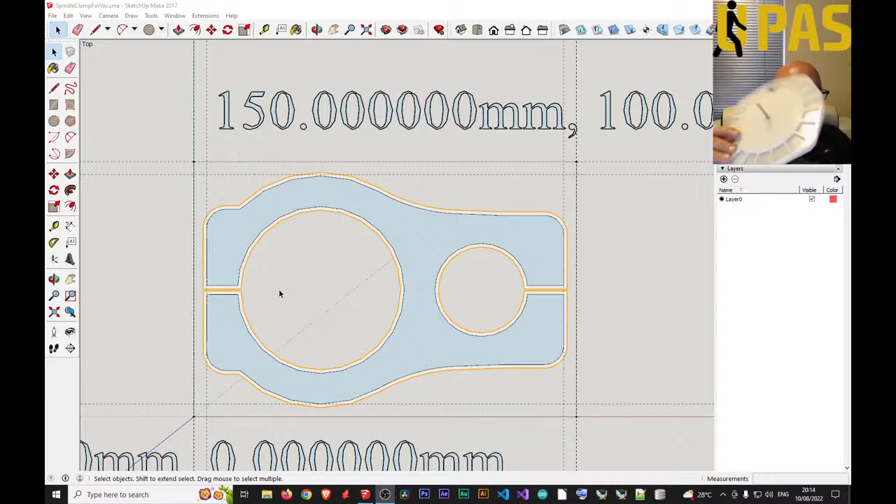Right, so I wanted to laser cut a carousel in layers, so I didn't have to mill too much waste, so just cutting out. Anyway, I ended up with some of this white opaque plastic sheet. So I designed it around the size I'd got. But it turns out it's far too, what shall I say? It's the kind of stuff that you'd probably injection mold or heat press to shape. It's too soft to mill, if you know what I mean.

This is what I managed to sort out. I put a temporary fix in it. You can't see it, but it's too frayed. There's bits sticking off it, and there's a lot of work to do to tidy it up. And it melts basically. It just melts. So this was a fail. So whenever you mill anything out, don't try to make it out of this soft stuff. It's not good. You want polycarbonate, really.

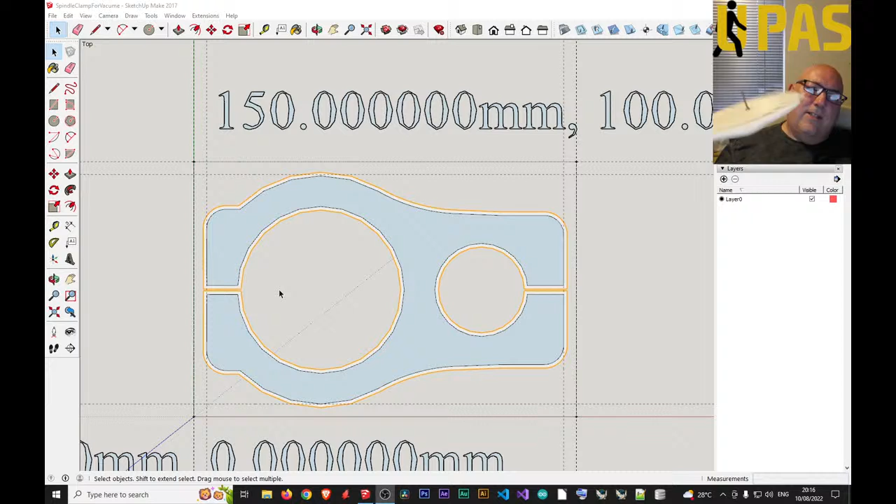This stuff, I don't know what it is. I bought it as a lot. Didn't know what it was. It's not really of any use. I suppose it might be alright if it was laser cut. So I did it on the CNC. Now this stuff, I definitely wouldn't. You probably need to laser cut it. I don't know if it would set on fire or not. Anyway, that was a fail. So a waste of material there.

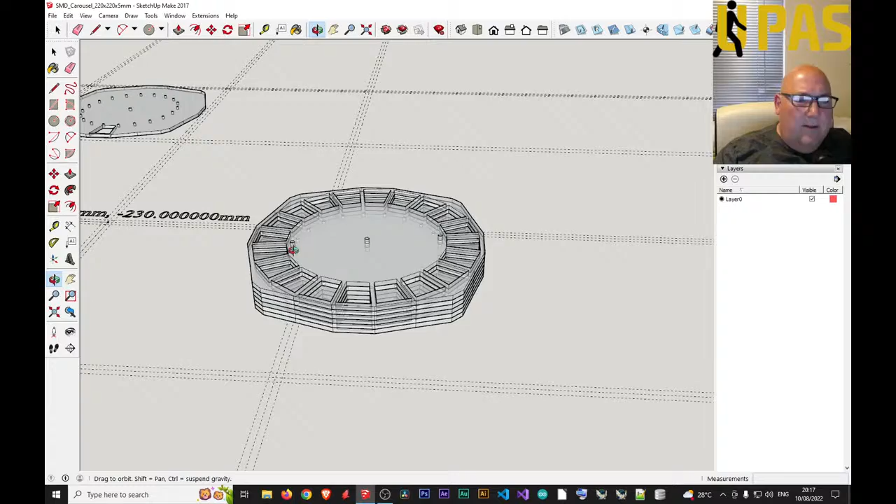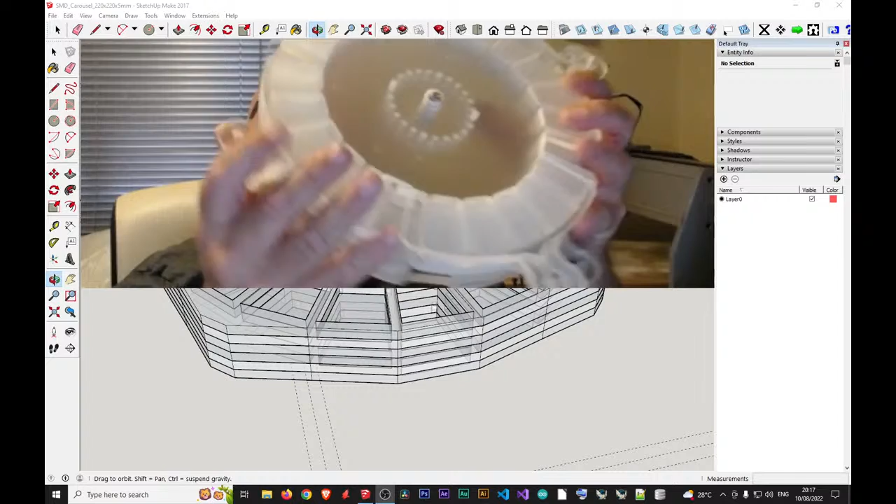If you saw my last live stream, let me just quickly load it up, and you can see. Yeah, this is the design. Let me just make sure. Right. So this is the design. I changed it. It wasn't to replace the one I did earlier, which was this one. Let's just quickly go over to a different view. So it wasn't to replace this one. This is the one I've been working on for weeks. I still like this one.

It's a heavy thing, and a lot of money's worth of material if you had to buy it new. It's about 12 mil polycarbonate, about 250 by 250, 12 mil thick. You're probably looking at about £7 to £12 just for a sheet. So there's a bit of money's worth there, but I didn't pay that because I bought the sheets as scrap.

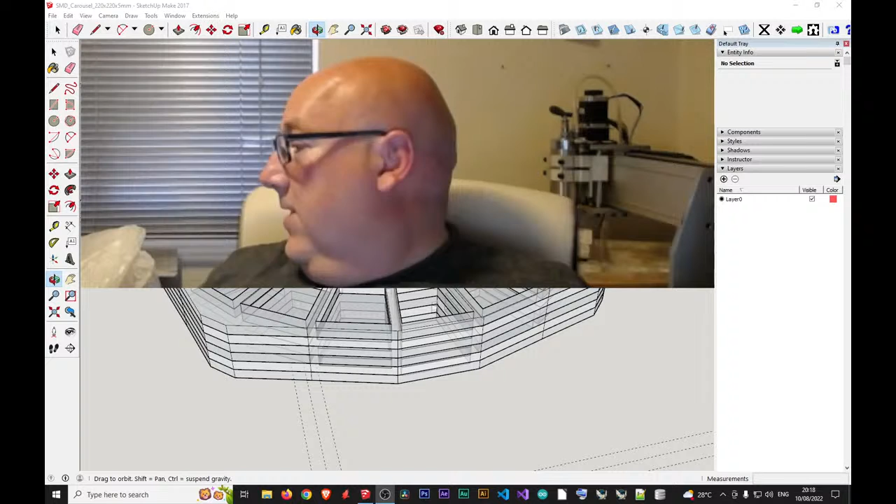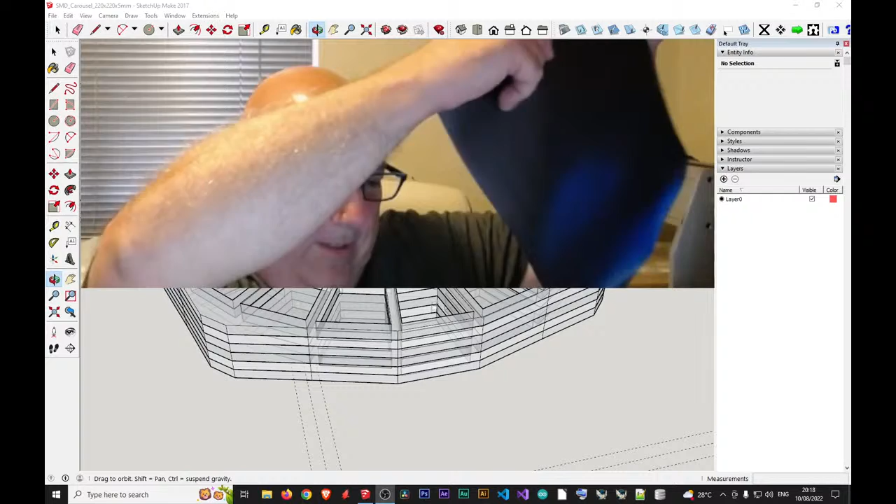Okay, so anyway, on a tangent, I have actually got hold of the piece of rubber I told you about last time. Right, so there's a bit of rubber here. It's a bit of magnetic rubber, like signage. It's magnetic one side, they told me. It's quite good actually. See there? There's a washer. You can put the washer and it just sticks to it. Apparently, it only sticks one side. Let me just try this side. Yeah, it doesn't actually stick that side, so that's good.

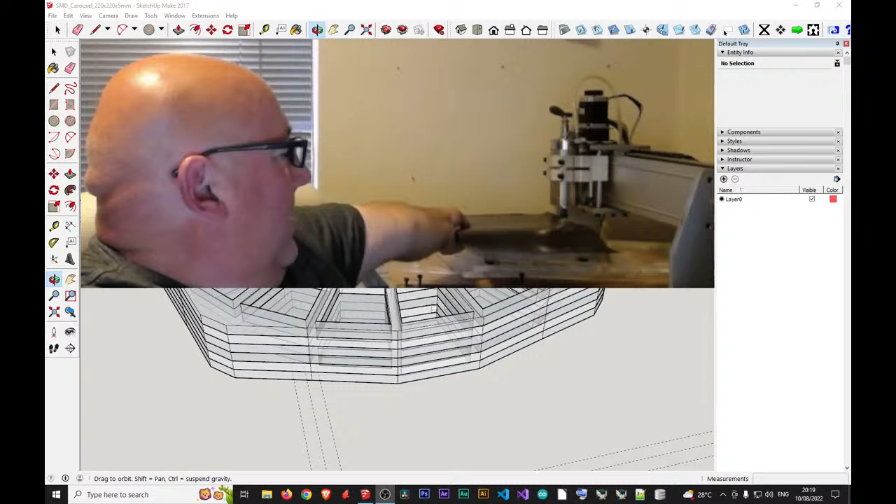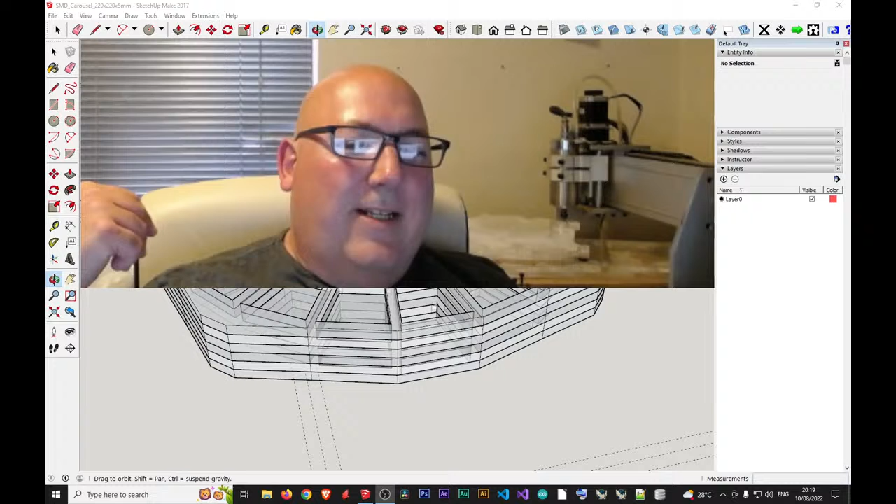So I can lie this on top of there. So what I've got to do is laser cut this out into a circle, or the shape of the carousel. I don't know yet. And either spray adhesive, or just rest it on top. I don't know whether surface mount bits will stick to it. I'd have to try some, but anyway, I just needed a rubber mat. So rather than just a rubber mat, it's magnetic as well, so if things are metal, they will stick to it. Okay, so there's that.

So going back to this design, this one was designed to be laser cut, and no milling apart from milling straight through. And they're 5mm sheets. And I changed the design of the handle slightly, and I made the access so you just go through it and down in. This was a slightly smaller thing.

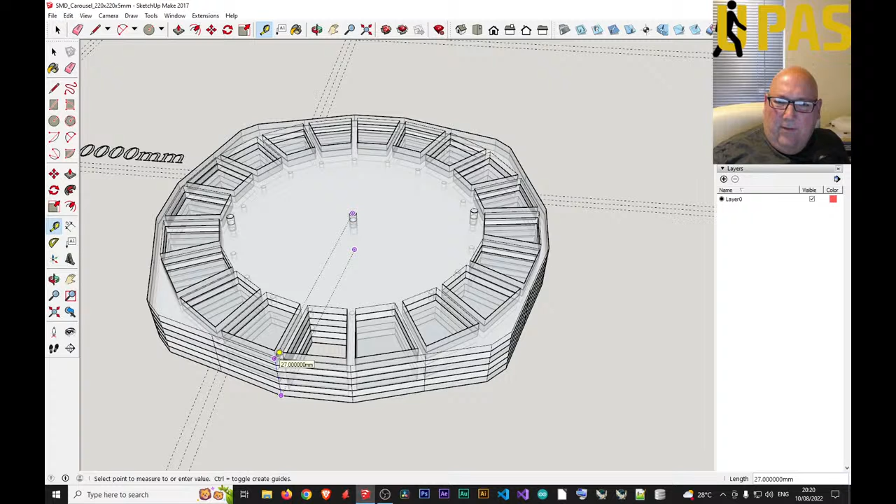What have we got? Let's have a look here. 220 instead of being 240, it's 220, and the height is 27. But I haven't actually. Oh yeah. This was designed to be as minimalistic as possible. So you've just got a base layer, which just happens to be the top layer as well. Okay. And you can see it spread out the ball bearing indents as well.

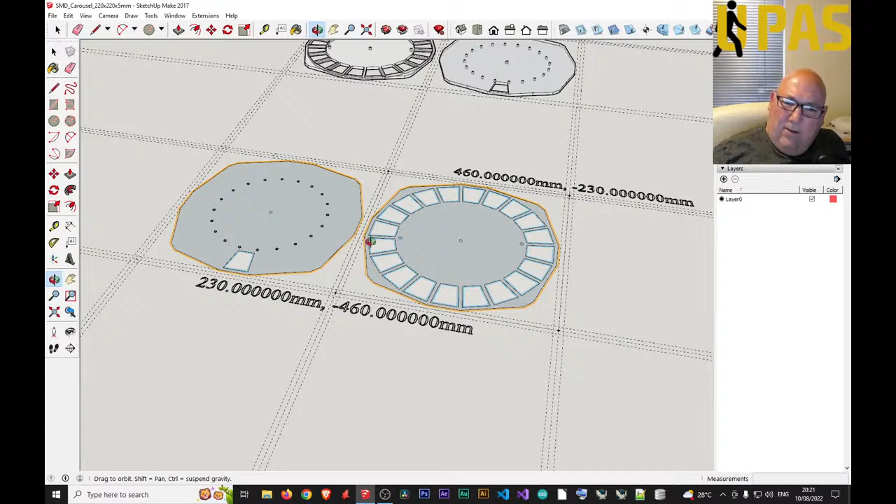And you just got two different layers basically, and this is designed to be laser cut. So you don't mill out the pockets or anything. You cut them straight out, and you just place that on top of there. So let's have a look over here. Yeah, so these are in two lots actually. This one, they come as a group. So if I go into that one, you'll see it's got a base layer and two upper layers. So the cutouts here are the pockets.

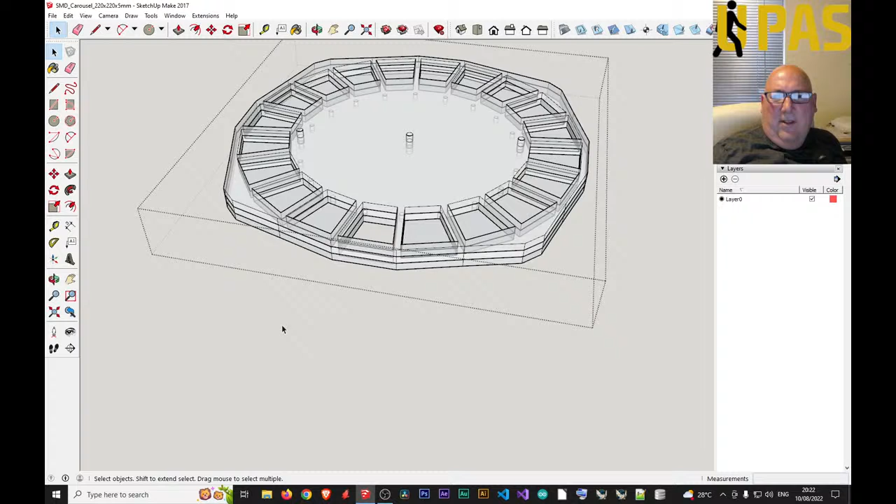But like I said, I tried to make it out of this. I don't even know what I've done with it now. Yeah, there it is. Tried to make it out of this soft stuff. No good at all. Gotta be careful with that. Anyway, so I will make another one of those out of some clear polycarbonate. But it's not to replace the other one. It's just an alternative way of making one. Without bearings, without anything. Anyway, I told you about that last time. So let's get back to today.

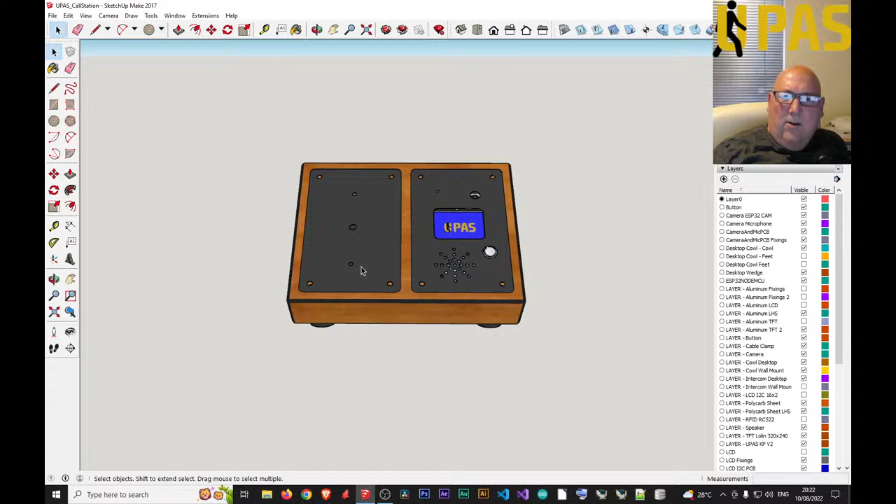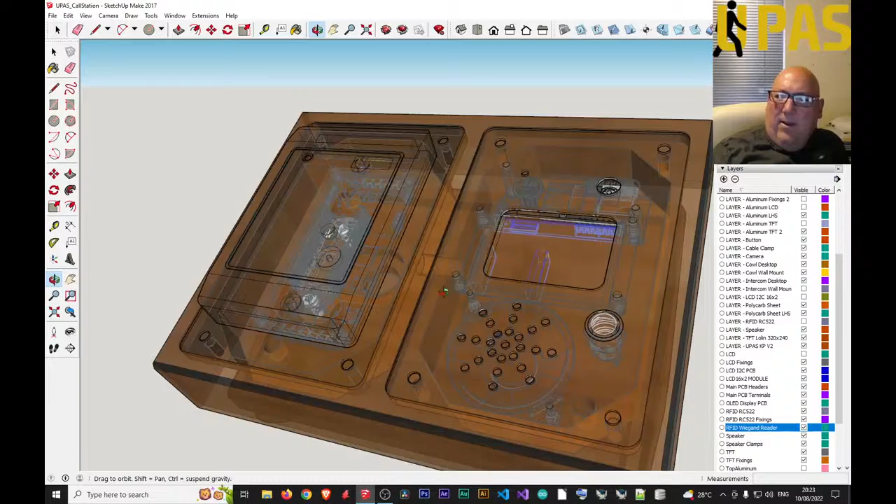Other project, the call station. Don't forget, we haven't forgot the call station yet. The UPAS ESP32 intercom call station. So I've got some extra wood for that now, and I've got a guy going to get me an offcut of mahogany next Sunday, if he can, to build this one. So if you haven't seen that one, let's go 3D X-ray. Yeah. So this is the one that I'm going to be building very soon. I just had a bit of a break while I've been working on the carousel, giving my mind a rest. So as soon as I finish my carousel and my clamp, we'll get back onto that.

So today, what I'm going to make is this. I designed this this morning. This is a spindle clamp. It's going to be made out of clear polycarbonate, 12mm. I've got a piece left over from making the carousel. Hopefully it's enough. Let me just measure that between there and there. What have we got? 89.5 mil. Okay, and we need a piece 140 mil. So 90 by 140 mil. Let's just get rid of this. I hope the piece I made the carousel out of is still gonna fit.

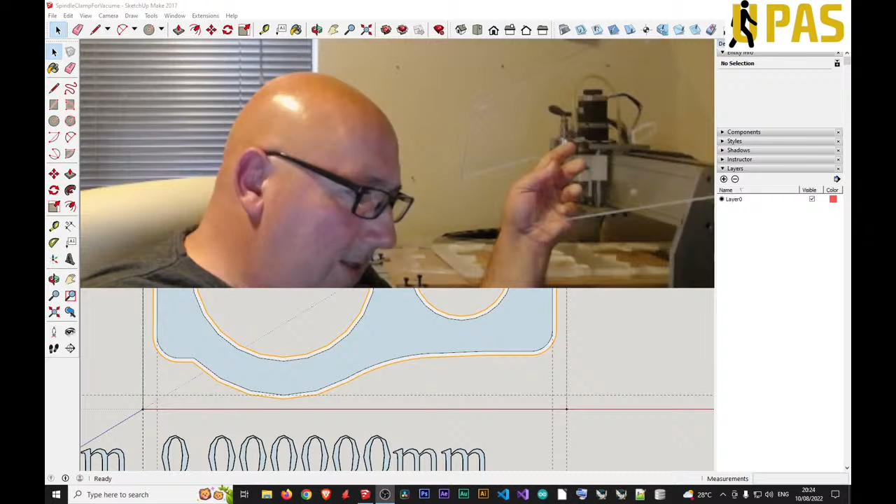By the way, that magnetic rubber sheet, it comes rolled up, and you have to leave it for a few hours or half a day to uncurl itself. Right, so let's just move a bit of that. Hang on, let's get you on to another view a minute. Yeah, this piece went a bit wrong, as you can see. So that's gonna have to just be for scrap, all testing stuff.

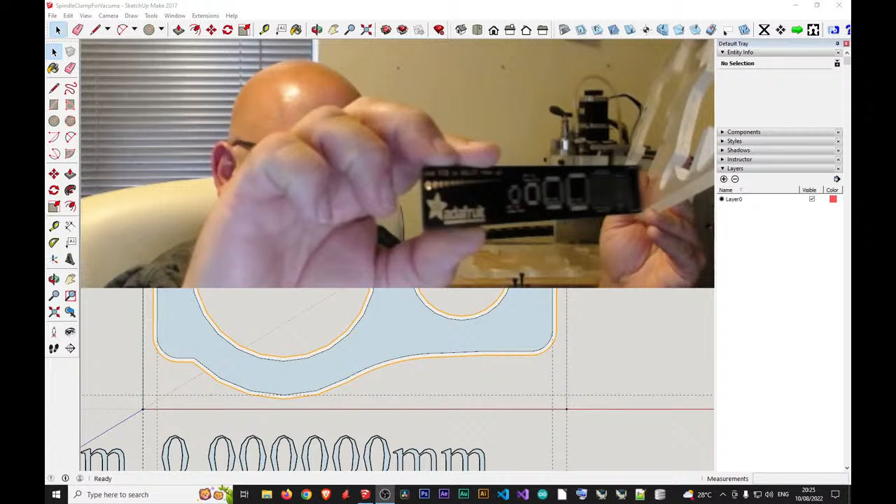That piece there, let's just show you a minute. Right. Okay, now this piece here, this is what's left out of the carousel. 2 layers of the carousel. I was hoping this middle bit would be wide enough, actually, to do that last bit. What have I got here? Oh, it's an Adafruit ruler. Yeah.

Right, anyway, so let's have a look. So I need, we said it was 90 mil across. Hang on, you can't see it. Let's get back to the other one. Right. Yes, 90. I'm pointing to it. We need the mouse. From there to there, it's about 90 mil. 140 mil from there to there. Now, on this piece here, what have I got? Let's have a quick measure.

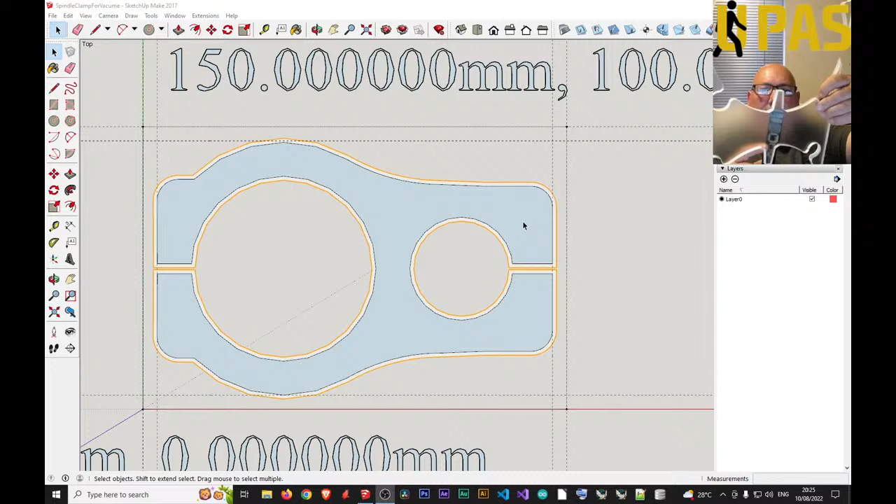Have I got 90 mil? Well, just about got 90 mil there. The smallest bit is 75 at the one end, and this end is 65. So let's just have a quick look at that. So 90 mil the one end, 65. Right, and then this bit here is 60. So I'm just trying to see if I can get it out of this bit. So I've got 60 there.

Yeah, I might be able to make it out of that bit. Yeah, I think I'll give that a go. Alright, it's going to be that way up, so I'm going to have to clamp that in the thing. I've got another piece as well. If it goes wrong, I'd rather do it out that bit. I've got another bit here. 2 bits. Both from the cutout.

That's different material, isn't it? I never noticed they are two different materials. Or is it? No, maybe wrong. No, they're both the same, apart from the thickness. Anyway, let's get rid of that one out of the way a minute.

Now today I just want to mill that out. I just want to make myself a piece. Oh, I've got another bit of this. I've got lots of bits of plastic here. That was the top layer I milled out for the carousel. The scrap bit that's left over. Alright, I'm gonna have to find some more plastic pretty soon. Right, so I'll put that down there.

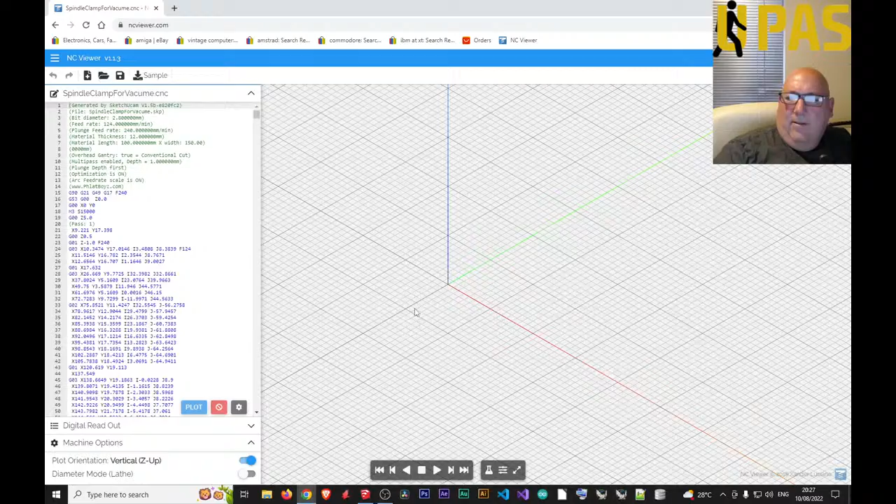So there's the G code. Well, representation of the tool path, really, rather than the G code. But yeah, there is the G code there. This is a representation of the tool path. So, see how many passes it is. 1, 2, 3... 15 passes. That's quite a lot. 15 passes. Why is it 15 passes?

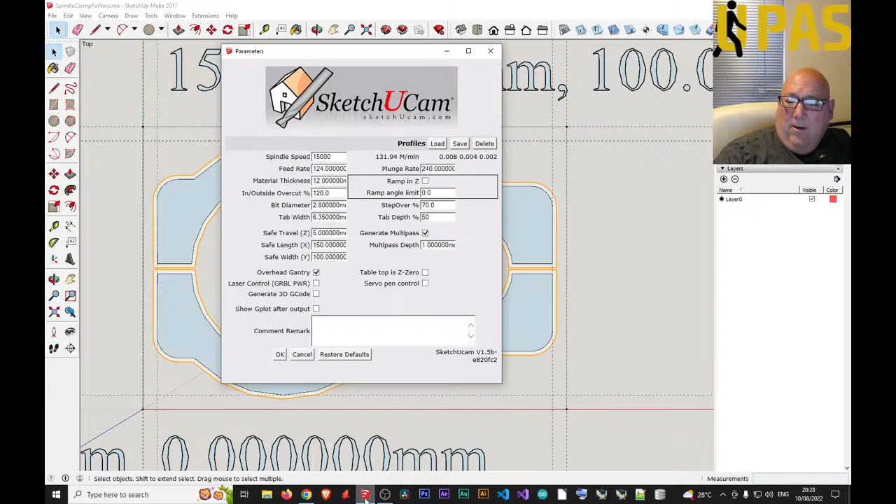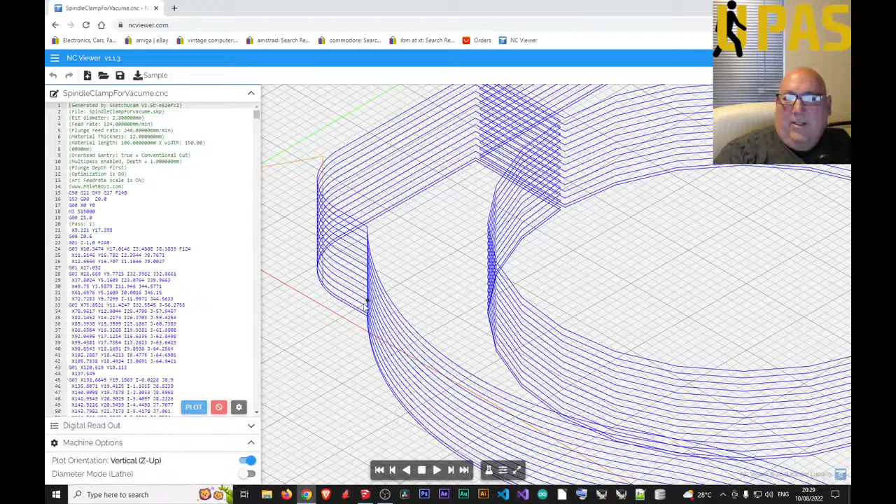Probably I told it to do 120%. I told it to go 120% inside outside overcut, so past the point of the thickness of the material. It's 12mm and we got 2.8 bit diameter, and we're doing multi-pass depth 1mm at a time. Okay, 1mm at a time. It is polycarbonate after all. Okay. How many did you say it was? 15. Yeah, so that makes sense. 120%. So it's doing an extra few.

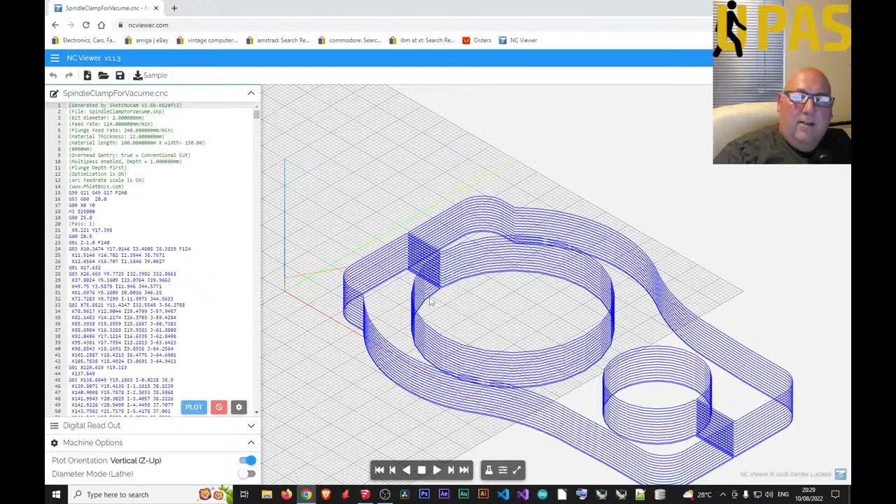So I don't want to deal with the bottom edge not milling enough. Sometimes if you make it exact size, it'll mill it, and if your tabletop or your spoil board is slightly uneven, you'll get a bit that hasn't cut out. I don't really want to do that. I'd rather it cut slightly into the spoil board, but I will have to hold on to this. That's the only problem. I'll have to slow down the last couple of cuts physically on the CNC, the milling software, Mach 3.

Okay, so back to this one. Yeah, so I made this, I just did it with two circles, and I've gone oversized, so the spindle size is 65 mil. I'll give it 1/2 mil of clearance. Okay, and my Henry Hoover vacuum cleaner is 36 mil. I've got an extra 1/2 mil on that.

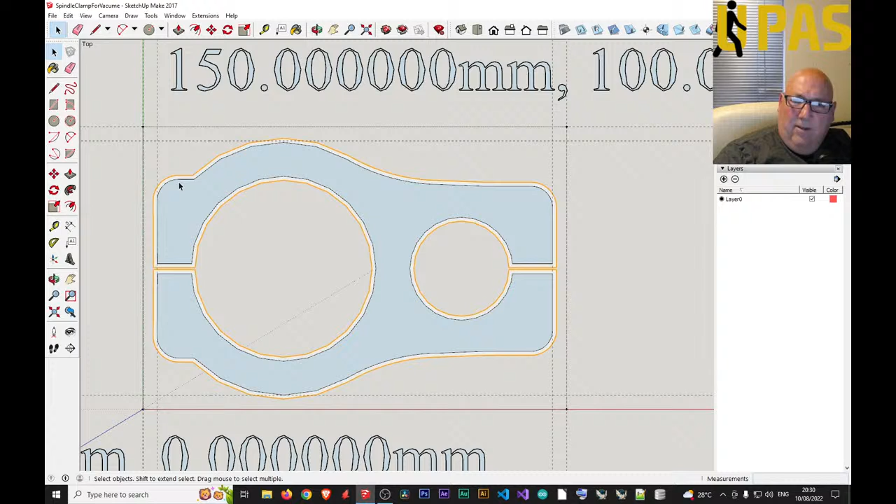So the idea, what I'm going to do, mill out this, and I'll have to manually get a drill and drill bit and drill through there, sideways on, and there. What I'll do is I'll drill it with one side so far and so far, so I can get a nut and hide the head and nut in there. Same with here. Then I'll drill a small hole to go all the way through, and you won't have to tighten it too tight. So just a little bit gives me a bit of clearance.

The 2.8 mil bit will mill around there. So let's have a look. 3.52. Yeah, so it's going to be a 3.5 mil gap either side, which gives me a little bit of leeway to clamp it up. Hopefully it won't snap. It's got to be quite a close tolerance to the size, because you don't want to be bending this too much. So wish me luck. Anyway, right.

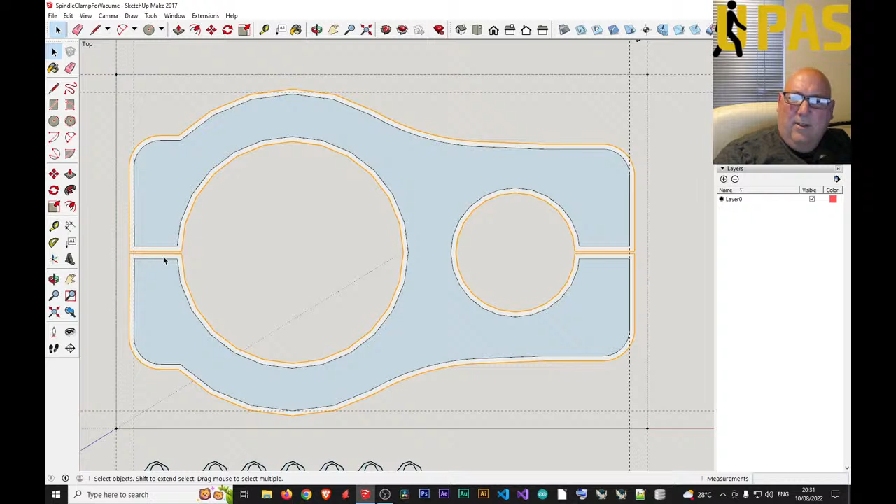So we've already got the G code for it. So all I need to do now is go over to the CNC, which is behind me. I haven't got the camera set up, so it's just that camera. Gonna have to look over it. Right, so I'm gonna have to swap over positions. The mic's gonna have to spin round. You're gonna have to see me sideways on for a bit.

Right, let's switch on some stuff. Switch on the CNC. Okay, and run the Mach 3 software. You can't see the software yet.

Okay. When you first switch on your CNC, your stepper motors start to spin a bit. They start to hiss, so you have to just go through all the motions just to stop them hissing. Still got the 2.8 mil bit on from the other day.

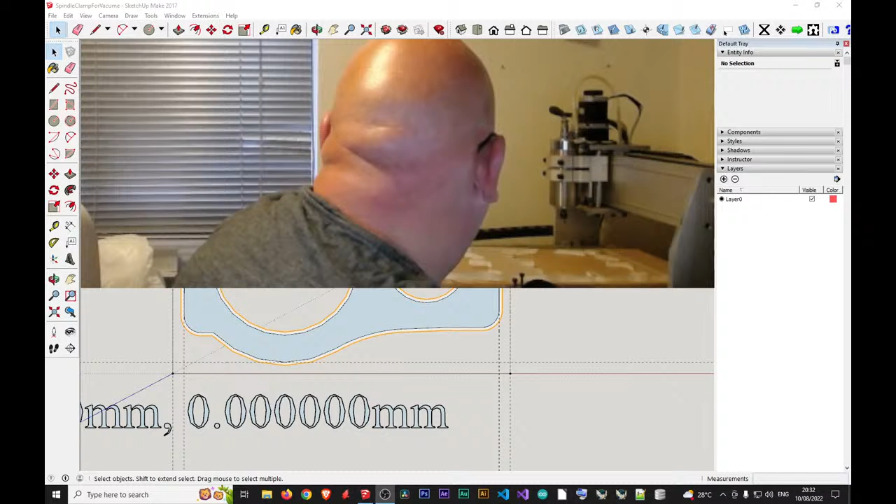Right, so what I'll do now is I've got to position this over here. That's okay there. So, yeah, I was milling some thinner stuff, so I've got to just adjust these clamps a little bit. Okay, bring that in line with the edge of that. That's not too bad. And this one.

Yeah, so I'm just making myself a clamp. With the spindle here, it'll sit around this. Loads of people have made one, but I've never bothered to make one. When it's milling, if you start doing production or small runs... it's alright for a prototype, you can just hold the vacuum cleaner around and get up the bits with the vacuum cleaner.

But if you're doing a few and you want to get on with something else on your computer, you don't really want to keep following it. It's dangerous as well if you're not looking at it, because that spindle could pass over your hand if you're not careful. So you want to basically just keep your hands away from it, really.

Right, I'm just trying to clamp this up. Yeah, it's getting there slowly. Yeah, so I'm just trying to use this scrap up, really, to get rid of this scrap material. Right, that's going to be awkward there. Okay. Go for that, can't I? Right, there.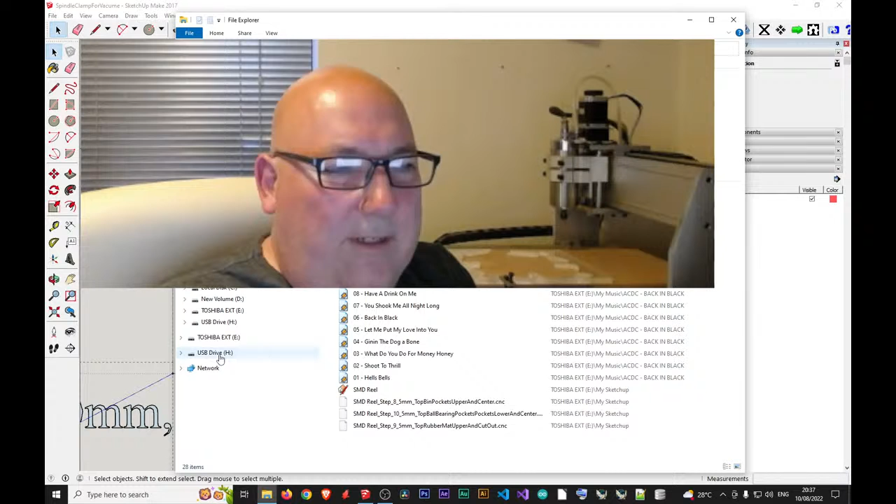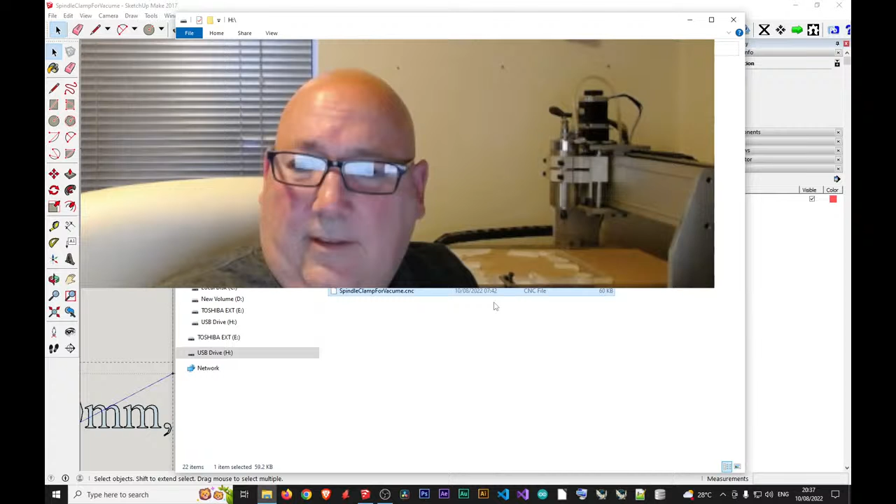Right, so I'll go into here. Go down to SketchUp, and there it is. That was done at 07:42 this morning. So that'll do, so I'll copy that onto the memory stick. Yeah. Done. Right, okie dokie.

Right, you can't see this bit. Just that way, there's a little Dell square monitor with an old Dell PC running Windows XP. It's not connected to the internet, although it has got a wireless card. It's only to use the Mach 3 software on, really. That's the only reason I have it there.

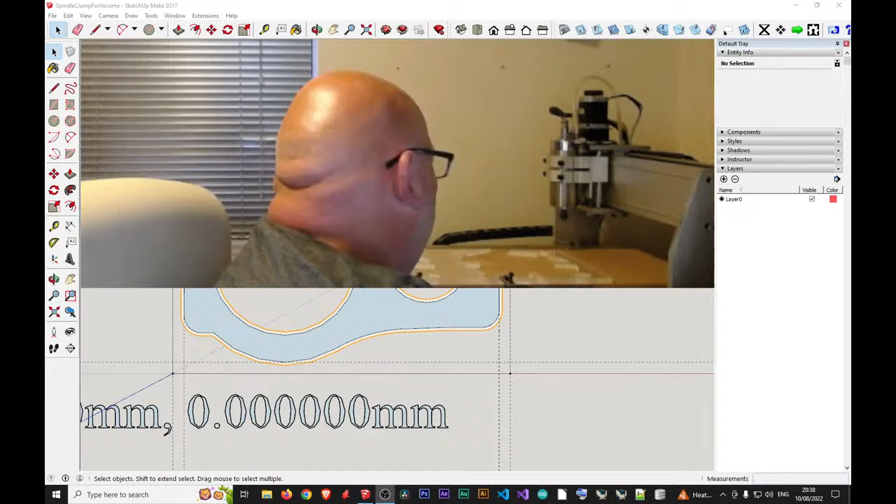Right, let me just get over to this. Okay, where are we? There it is. Spindle clamp for vacuum. Okay, yeah, that looks good. Right, I'm going to bring the spindle over to where we need it. Yeah, it makes a noise. So I've got to be careful because I haven't done a homing position on it for a while.

I've added the homing limits, X, Y, and Z home position limits. In fact, I'll tell you what, I'll show you that. You have not seen that, have you? Let's just reference all home. Ready? I'll keep my head out of the way. Right, so ref all home. Here we go.

Right, so this is going to go. Hopefully all the switches are working. I'll keep out the way while you have a look. Hello, testing, 1, 2. Yeah, I'm mad, I know. So basically, it's just going to go at slow speed. I normally get it near the limits to speed up the process.

But it's going to bump into just over here. Just here, I don't know if you can see it, there's a little micro switch. It needs tightening actually, so it should bump into this bit here. Hopefully, let's have a look. Yeah, it bumps into it, stops, and then it goes to the next piece. It's already done the Z axis, and it's now done the Y, and now it's doing the X.

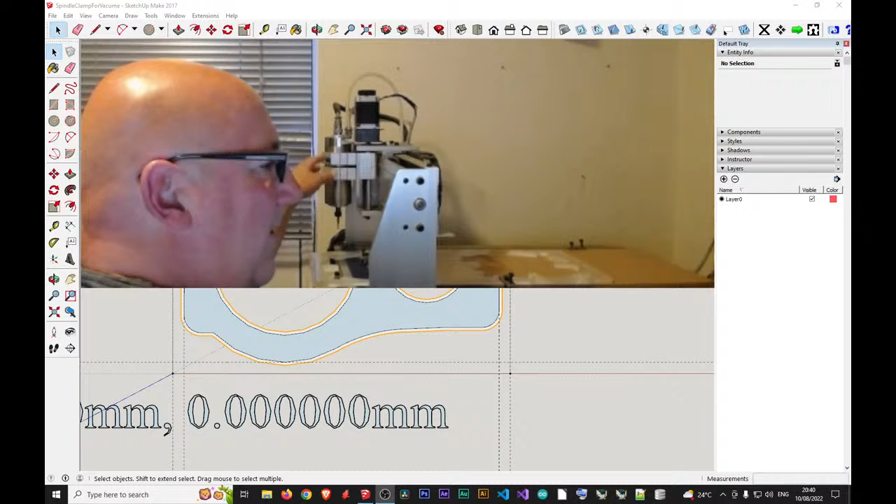And this basically just stops it depending on where you load your material, set your soft coordinates. Right, that's finished. So that's referenced all home. If I click on machine coordinates, they're all on 0 now. Take machine coordinates off. It'll go wherever I set the soft coordinates. So I need to come back over. Oh, you can't see that.

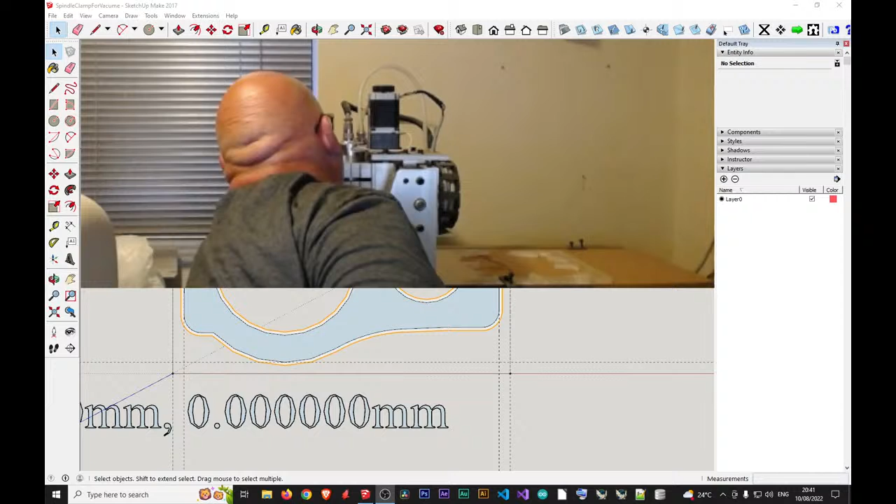So yeah, it will go right to the end of the CNC. Let's get it back over here. But if I keep going right now to the end of the X. Ah, didn't stop then. Didn't slow down then. Why didn't it slow down? I've got a broken wire. That was supposed to slow down then and stop before it. Yeah, anyway, you see why you need to do it. I've not checked that for a while.

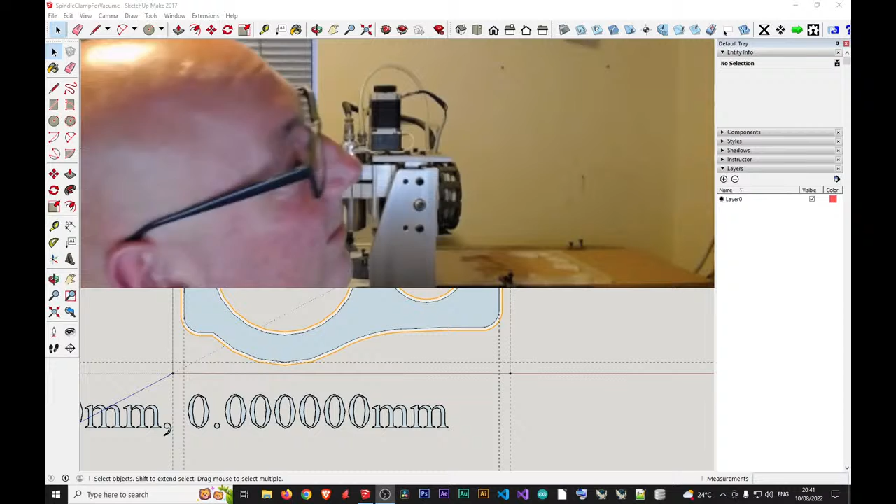It basically prevents. I know why it did it. I've got my soft limits switched off. Right, I won't do anything. I'll bring it back over again. If you keep on going, you'll break the couplers in this that hold the stepper motor shafts to the ball screws. See that? You can't see it. Hang on. Let's try again. It slows down on its own. Look.

Yeah. And I had my soft limit switched off, so that's a trap for young players. Don't have your soft limit switched off. Anyway, that's okay for now. Right, I'm going to just go right over. Now that's a bit sticking up there, that is. I could do with this being flipped round, really. The problem I got is I got three clamps on the table. 1, 2, and 3 around here.

And the material, I don't know if you can see it's sticking up. It might not matter, but because it's sticking up, it's going to cut it a bit on the. It might start vibrating. I need to cut this end, but my G code on here, it's set the wrong way around. I could spin it 180, and then it'll work out. But tell you what, I'll leave it as it is. Right, here we go. So I need to get this end as far as I can over there.

Right, so I'm at the end of that fold in the scrap. Yeah, it needs to start from below there, but then it needs to encompass it. Easier said than done, yeah. I'll tell you what I'll do. I'll reference the Y to 0 and I'll see how far I can go across before it gets to the end of the material. Right, 111. So if I go down to sort of halfway, 56.

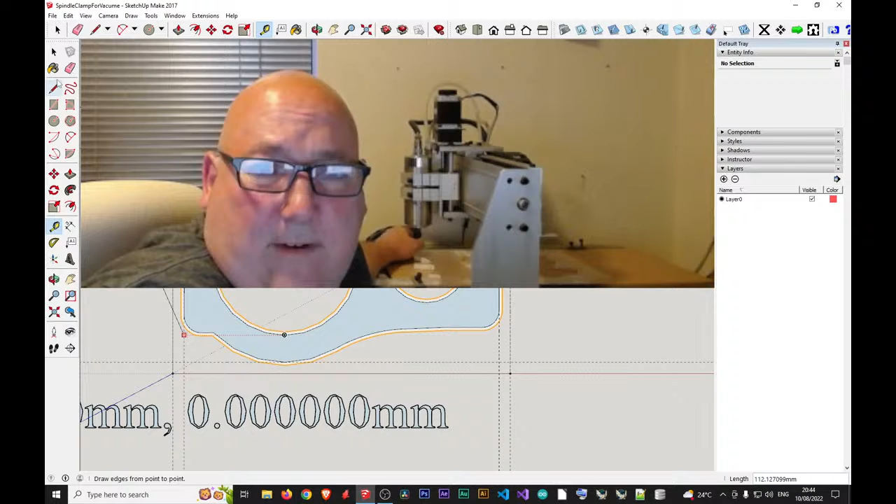I'm trying to match this bit up with this wide bit here. So I need to go back a bit further. It's a bit trial and error really. It's easy when you've just got a square bit to mill from. So that needs to be 44 mil. So about 44 mil to there. Okay. Right, I'm going to raise the Z up and set the Z so it's going to be milling in free space. This is purely so I can test it.

I'll set the Y. Let's come back a bit on the Y. Yeah. A bit more, about there. Right. Okay, so I can regenerate the toolpath. Pity you can't see this screen really. Anyway. Right, I'm just going to run it without the spindle running. So cycle start. Here we go. Let's see what it does. As long as it stays over the material.

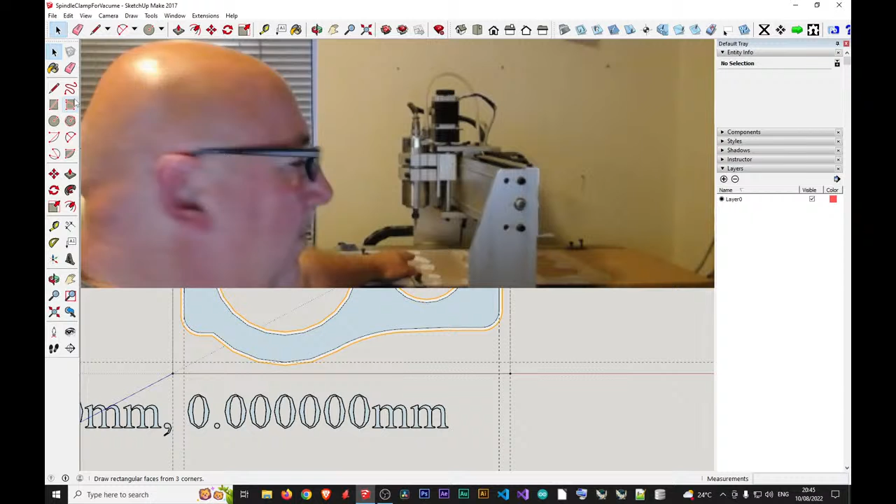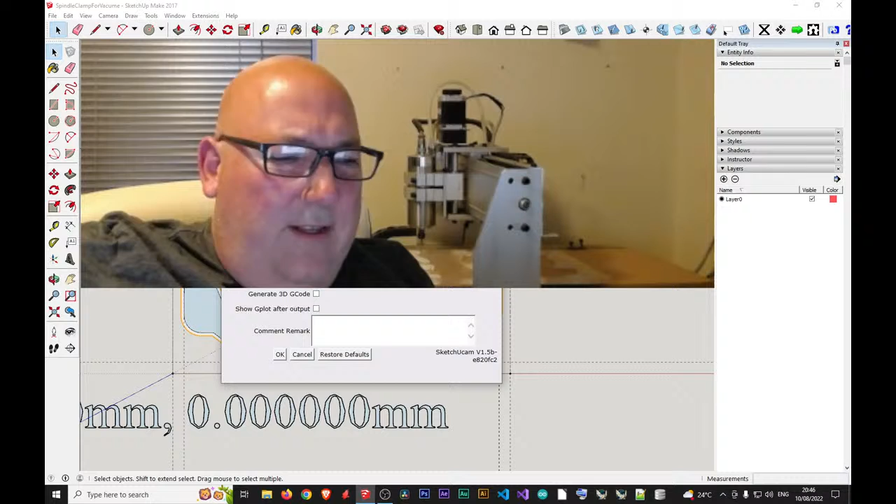Anyway, I've had a hell of a week this week at work. I've been constantly driving from start to stop. No lunch break. And so for 3 days on the run, no lunch break. Not much. Just loads of jobs to get around to.

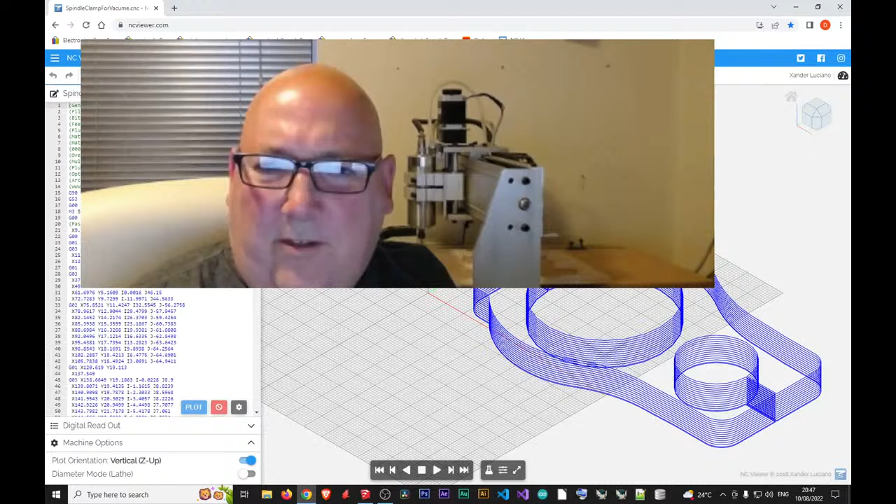Yeah, so that's probably why that went wrong. Hang on. Yeah, that's why it was slow. Okay, yeah, that'll do. Everything else is good, so I just need to generate that G code again. There we go. Overwrite it. Job done. Okay. Have a quick browse in here to make sure I haven't gone tits up. There we go. Yeah, it's the same thing, but it doesn't show this speed, does it? Right, that'll be it. Okay. Right, pen drive out again. Sorry about all the beeps.

Anyway. Right, here we go. Load it back up again. So it's the same tool path, but different speed, yeah. There we go. Okay, almost the same. So let's go to Z. Hang on. Go to Z. Regenerate toolpath. Cycle start. Okay, and it should go at not the fastest, but at a nice speed to get the accurate shape. Ah, it's doing the slow again.

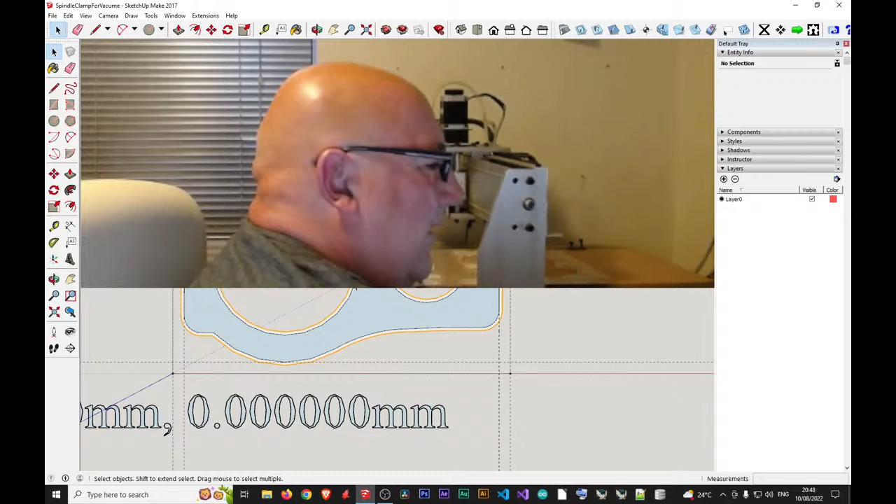Do you know something? I just did something silly, didn't I? You know what I did? I didn't copy it to the pen drive. I only saved it over top of the old temporary location there. Oh dear, it's too late. I've been to work all day in the sun, so you got to give me a bit of leeway, surely. Right, anyway, so there it is, 2047. Copy that to the pen drive. Overwrite, replace the destination. Yeah, done.

There you go. Not everyone is infallible, especially after being out in the sun, being roasted in the sun. In the UK, it's the summer and we're on a heat wave, so yeah.

Right, here we go. Try again. Okay, hope that's done it. Go to Z, regenerate the toolpath. You can't see, my head's in the way. Right, cycle start. Let's see, that should be fast this time. Yeah, that's fast. I'm just watching it now, see if I've got enough material to go around. It's cutting around the hose. And back out, and then round the sides. I think I might just... No. I saw it then cut across a gap, so what I'll do is I'll watch it again in a minute. See if I can bring it back down.

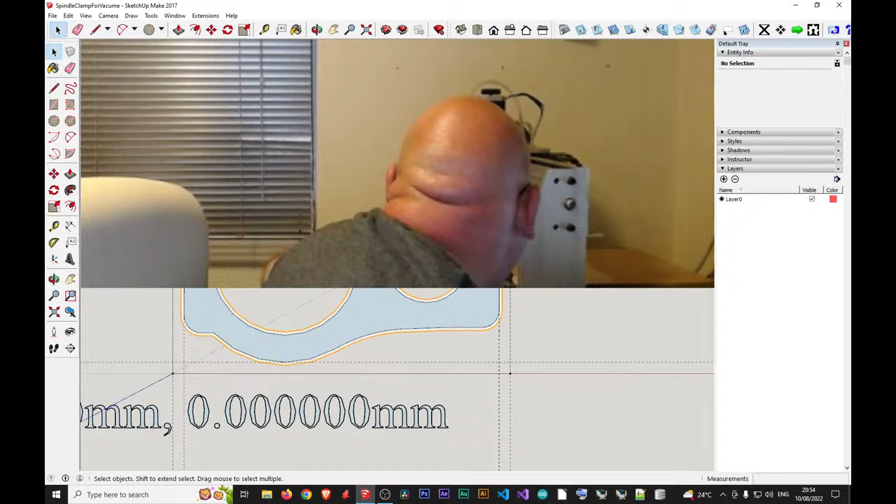Right. Let's just have a look. All this just to put a clamp on your spindle. You probably buy them. Might need to move it slightly. Yeah, I can see we're a bit too far over. Right, so stop that. Go to Z.

I need to just do a few changes. You don't have this problem if you've got a new piece of material. So I'll come over a bit. Right, and back that way a bit. Is it that way? Yeah. Right, let's try that. So I'm just zeroing out the X and Y, regenerate a toolpath, rewind, and then cycle start.

It always retracts above, I don't know why. Suppose it gives you a chance to change your bit. That's within the one side. I'm just trying to use the scrap up. Yeah, I think that'll do it. Just make sure.

It's playing a tune. Do do do do do do do.

Yeah, that's going to work. I'll go back to Z. I'm just going to move it back a very tiny touch. That's it. Right, I'm going to set that there. Now I'm going to come over and set the height, the top of the material, sort of midway. Yeah, about there. Okay, just the Z.

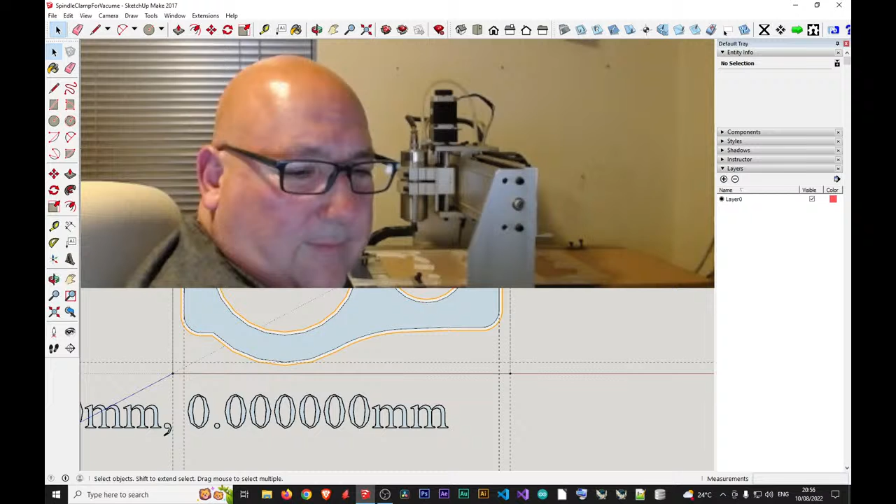Been 43 minutes already. Done no talking yet. Anyway, here, I'm just gonna have a drink of this.

Hopefully this will be the last time I have to chase the spindle around with a vacuum. There's the vacuum. So as I cut this one, this should be the last one I have to chase around. Yeah. Okay. Here goes nothing. Vacuum on. Spindle on. Spindle's on. I'll hold the vacuum. This is what I have to do. I have to hold the vacuum on and follow it around. So hopefully we're spinning.

I don't know whether I need to. I might need to. I'm going to increase the spindle speed a bit because I slowed it down. Right, here goes nothing then. Ready? Here we go. I'll keep out the way. Cycle start. You have to get ready if it starts to make a noise and starts to grind or go too fast. Here it goes. It's quite fast, really. Should be alright, though.

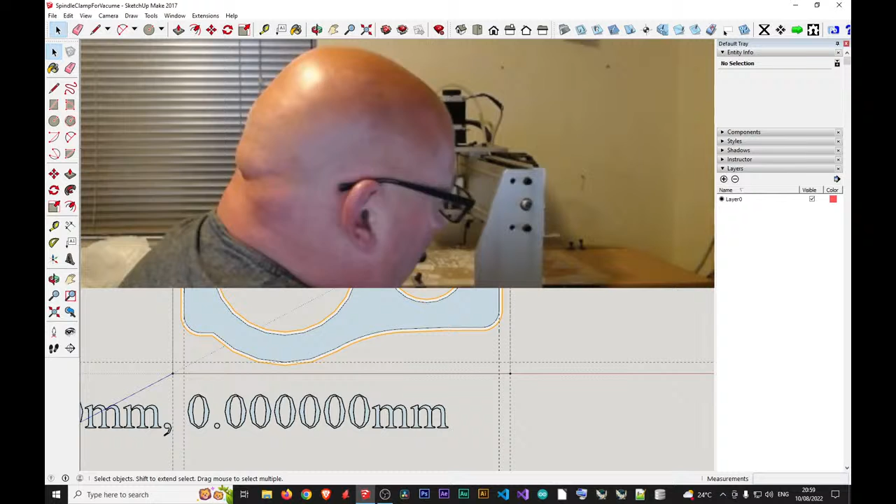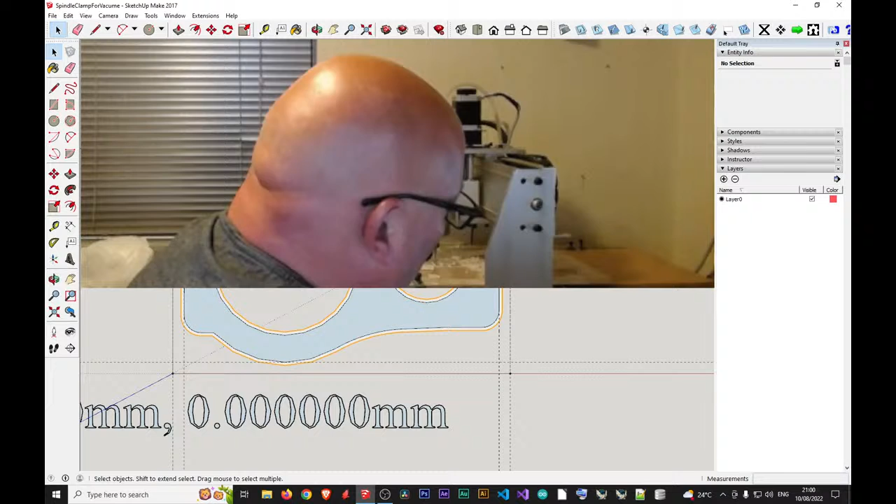The ultimate thing was to get your CNC to make the parts for a CNC. A new improved version of it, bigger. That'll be nice, wouldn't it? You can mill out all this stuff. Make some new bits. Make another one and sell this one, yeah. It's doing quite well, really, considering I haven't clamped the material down enough on the one side. It's looking well, just over a quarter way through.

So it's all leading up to me getting on with my cowl project. So I've got to mill wood soon. And that's much better than milling this plastic. It smells a bit, this plastic.

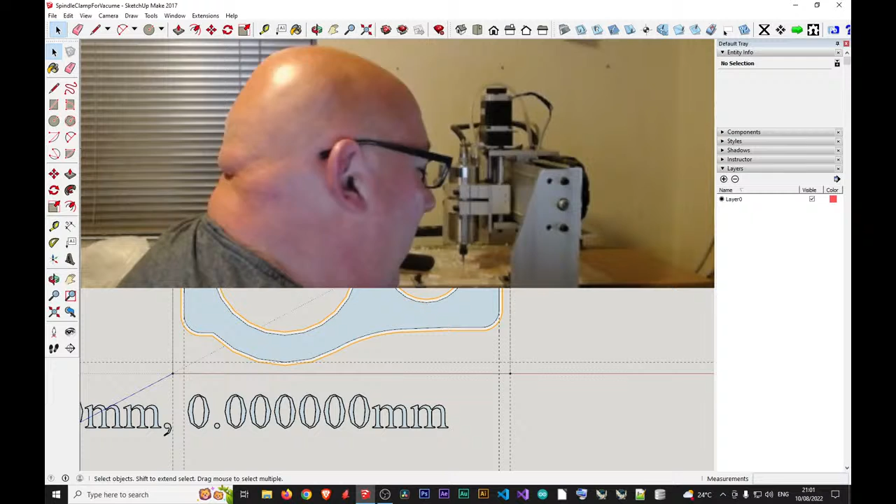I've got to be careful when it does the last pass, or the last two passes, because it might be starting to cut it out, and I've got no tabs on it. There's no tabs, so I'm going to have to try and hold the piece still. Very difficult. So if you suddenly see me leaping towards it to hold it, don't get too worried. I could do with a vacuum table, really. Stick the piece down, hold it still, rather than trying to clamp it.

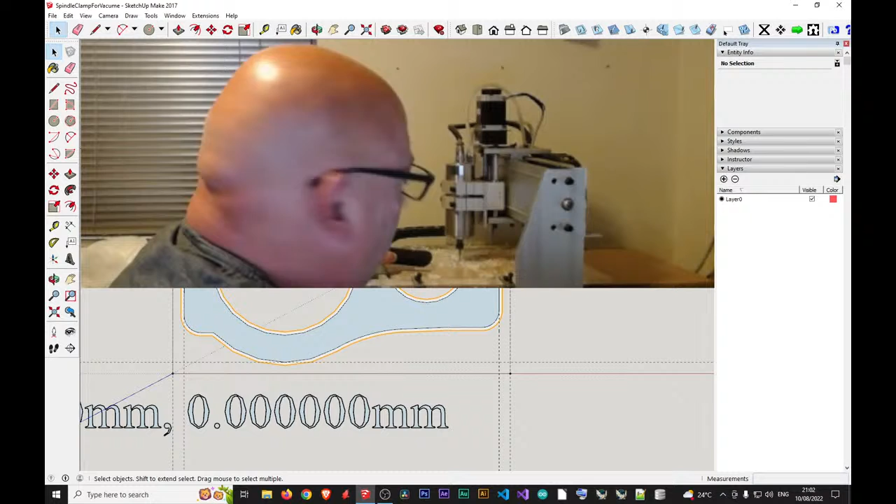I was going to say there's less material coming off than I did the carousel, but this is a 2.8mm bit instead of the 4mm bit, or 3.9mm bit. Oh yeah, it's getting quite low now. Right, I might have to let go of the mouse now. So I've got to keep one hand on the stop button, and one hand on the material, and one hand on the Hoover, so I might have to forego the Hoover.

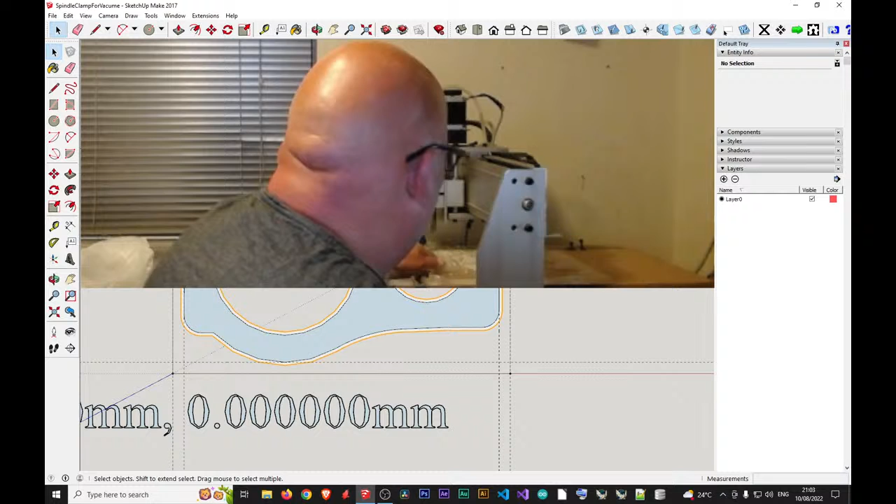Tell you what, I'm going to forego the vacuum cleaner. I've got to make sure this doesn't come apart well. I've got to keep my fingers out of the way as well, and get ready on the stop button. Easier said than done. If this piece starts to move freely, I'll go click stop first because it will eat through it. It'll eat through it, so gotta be careful.

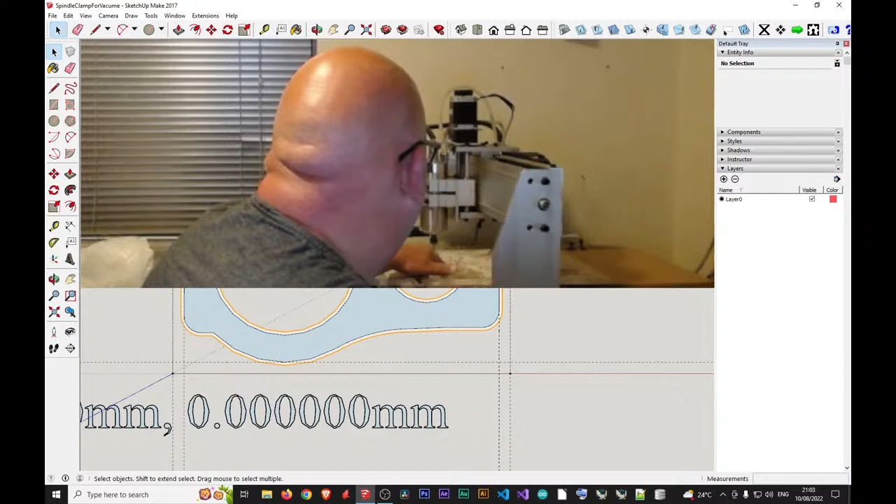What I'll do is keep pressing it and seeing if it comes free. Keep my fingers out of the way. Don't know, hospital job. I can hear it now, cutting the last few bits. Gotta be an easy way, isn't there? I think I need to make myself a vacuum table. Yeah, I've made this hose carrier, so the next thing is a vacuum table.

Right, it's about ready to come out, this is. And what'll happen, the middle bits will probably fall out. You can see there's all sorts of noises coming out of it now. You've got to be so careful. Keep my fingers out of the way. Now this centerpiece will probably pop out. No, it's still, yeah, it's just starting to come loose now. It's just starting to come adrift.

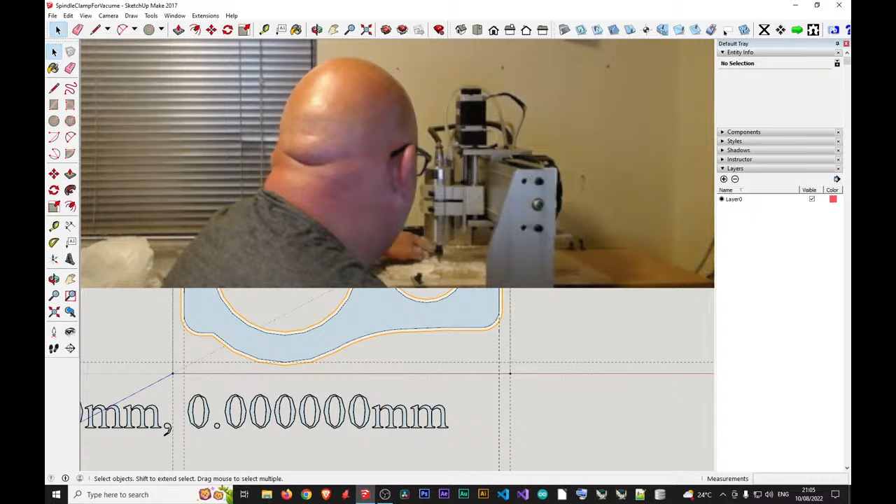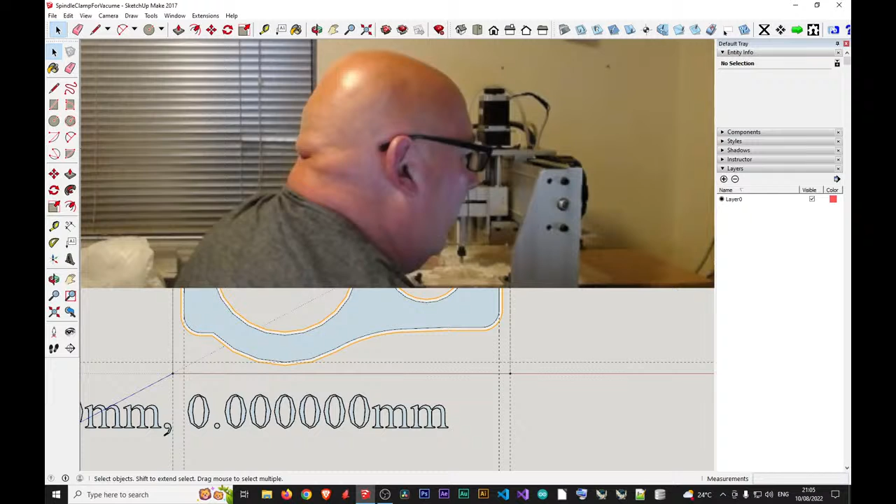I've just pressed on stop. Oh, hang on. I just pressed stop by mistake, but it's probably a good thing. Right, it's come free, sort of. Hang on. I need it to mill that little piece off, so I'm going to click cycle start. Right, well, let's just call it quits there. Call it quits while we're ahead. It's loose anyway. I'm just going to back the spindle off out the way for a bit. Let's just get my hand clean of the bits and switch the spindle off.

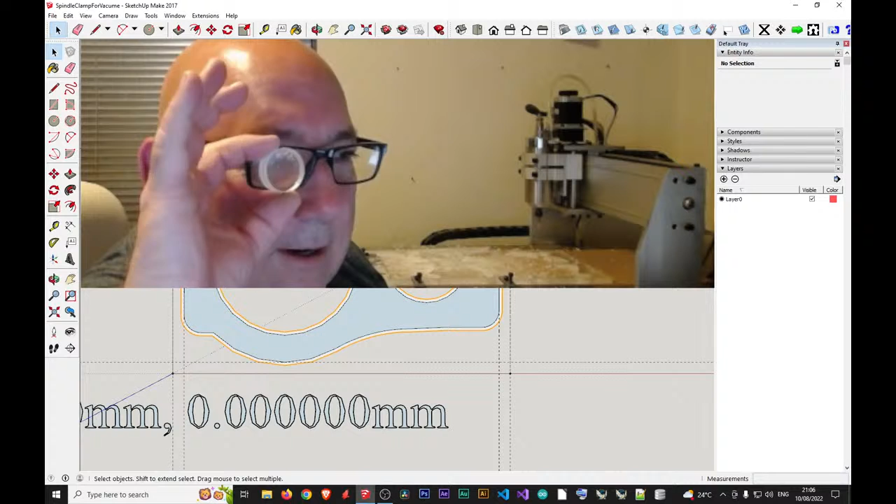Right, okay, so that was the first bit that fell out. It's a nice little circle, isn't it? Bit like an eyepiece. Aye, aye. Yeah, do jokes as well.

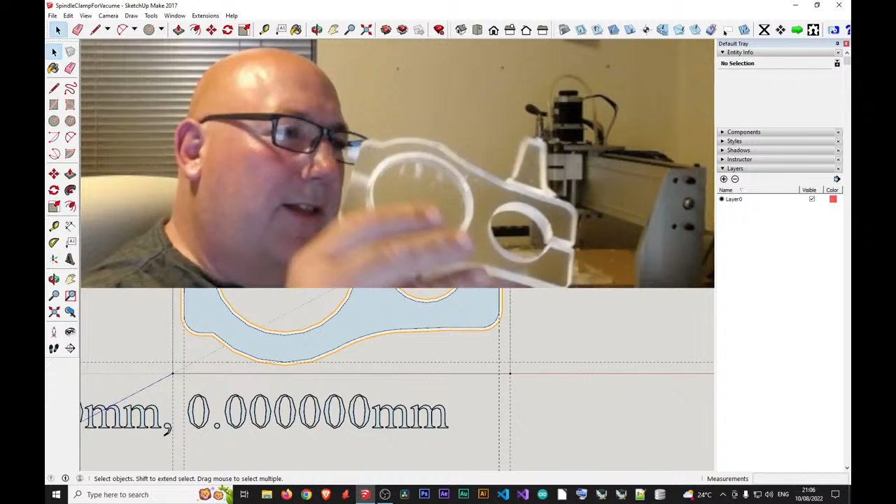Right, so we're out. Sort of out. As you can see, but not quite all the way out. It hasn't done the centre bit out, and this bit here's still attached, but it's about to fall off, which it has done. So I was trying to avoid having to get rid of that little piece there, but all you do is press on it the opposite way, and it just comes off anyway. I'll just go over it with a bit of sandpaper or something. That's the bit that I told you it wasn't getting. There's not enough material to do it, it's slightly out of shape. Doesn't matter. It still did the trick.

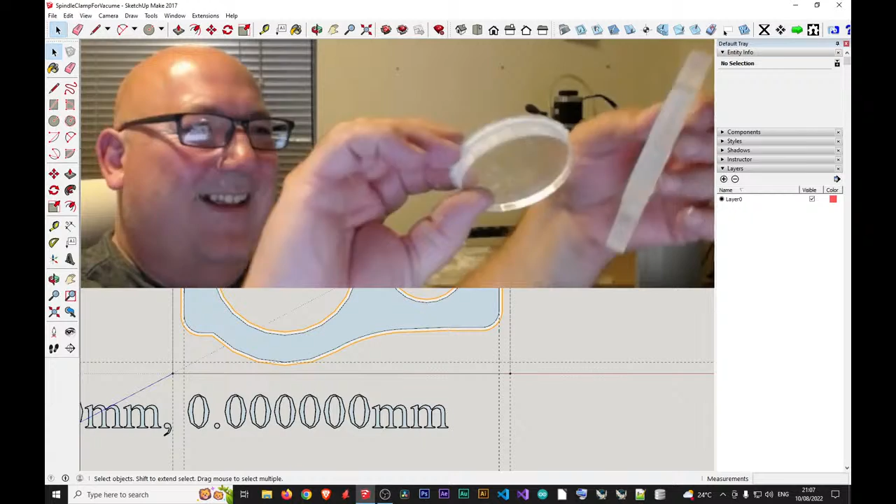Now I've got to get this middle bit out. What happened there? Oh, here we go. Hey, it's out. Yeah, it's out. I thought I was actually breaking it. I didn't realise it was coming out. Right, so there's a hell of a mess everywhere, as you can see, but you get the idea.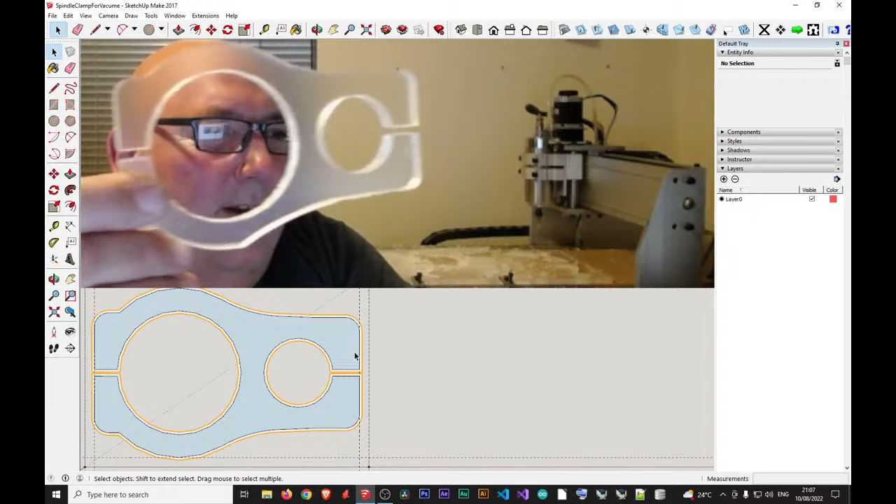So that's the drawing. Same way up as the drawing. Hang on, let's get back onto this drawing. Let's try and get it to scale. Is that to scale? No. Hang on. Yeah, so there it is. Imagine if you tried to make that. I'll see if it fits. I've got a little bit of edge to smooth off here, but in theory, it should fit over the spindle, shouldn't it?

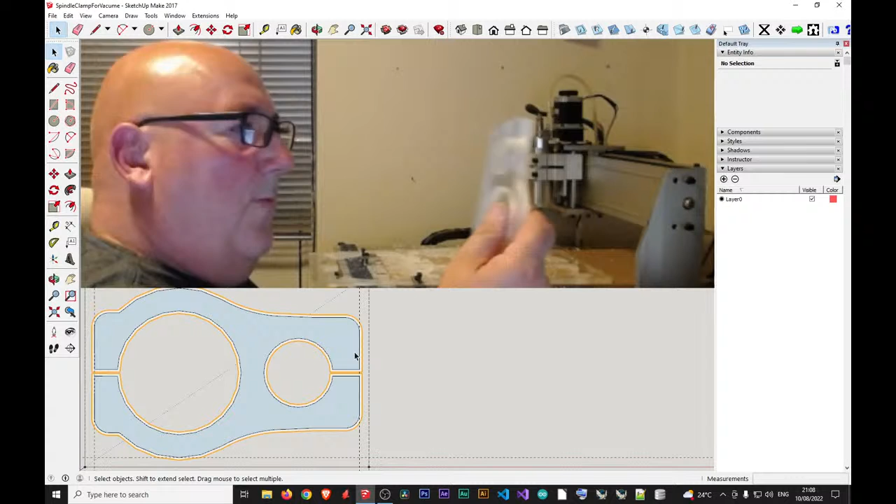Tell you what, let's try the hose pipe first, see how good it is. Right, vacuum should fit in this bit. Look at that. Brilliant, eh? Now, when I drill that through and tighten it, will it clamp on it? Yeah, it's just right. Brilliant. Right, so next, let's bring the spindle over here so you can see it. I'm just bringing the spindle up this way a bit.

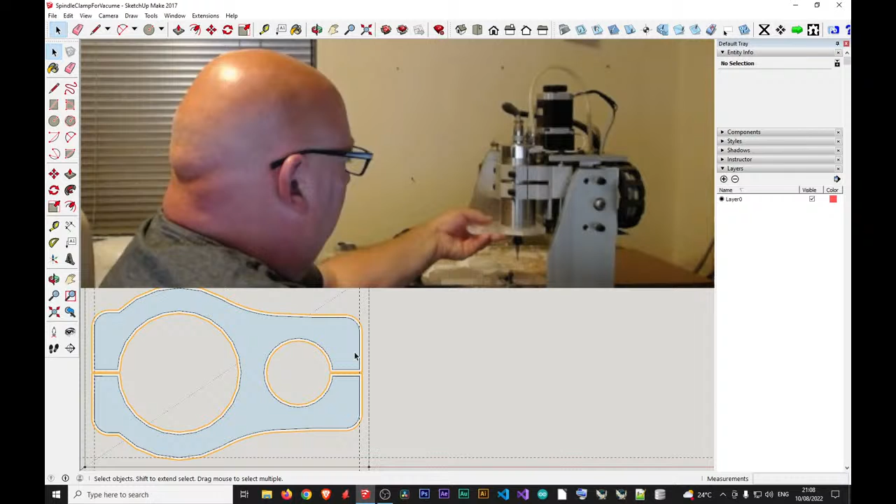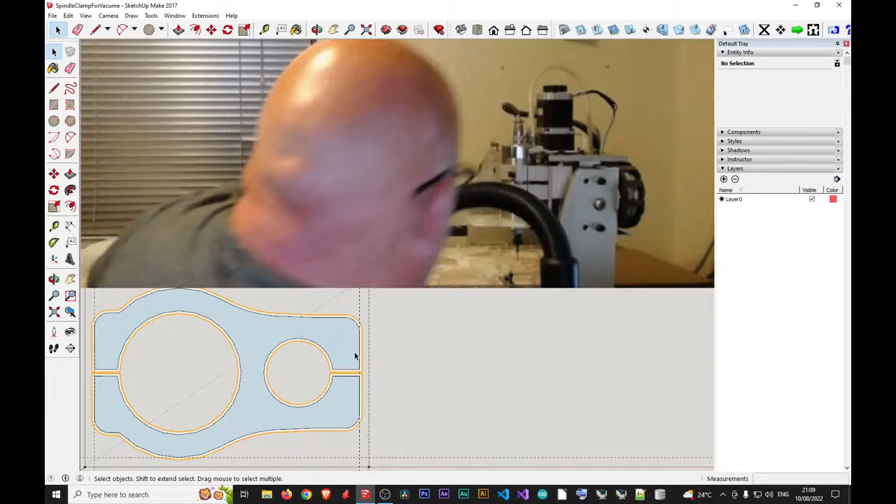Now, this is designed to go on here. Oh, look at that. Oh, it just fits, look. It doesn't even need clamping, but what a brilliant fit. So the hose will sit. Now, the only thing is whether it's too brittle for a hose, the pressure of the hose pulling against it. Do you know what I mean? Let's have a look. So that will go into there, and that will be clamped there like that.

Brilliant. I like it. So really, the vacuum is going to have to sit over the back somewhere. So this pipe is going to have to go with the umbilical here, somehow be clamped away so it doesn't get in the way of the workpiece. Well, I'd say that was a success. Definitely a success. So let's just back it off a bit.

And reset and unplug the spindle, because the inverter makes a bit of a row. The fan on the inverter, that'll quieten down as soon as it kicks out. Yeah, gone. And I can close the program, shut down this little PC, and switch off that.

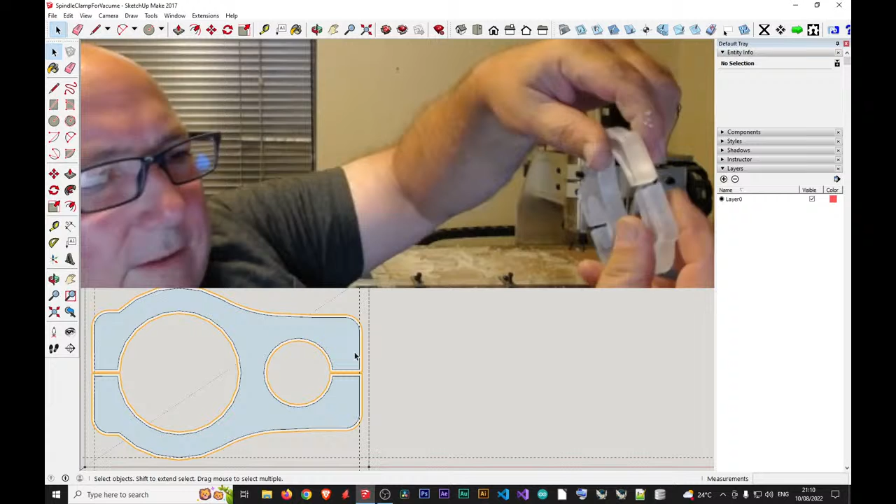Okay, so obviously it's got a bit of this way motion. See that? I don't know with polycarbonate if it's got a bit of strength on it. So, you know, shear. I don't know if it's got any shear capability or will it just snap there. I don't know. Right, switch off. That's it. It's a bit quieter now. Switch off all that stuff.

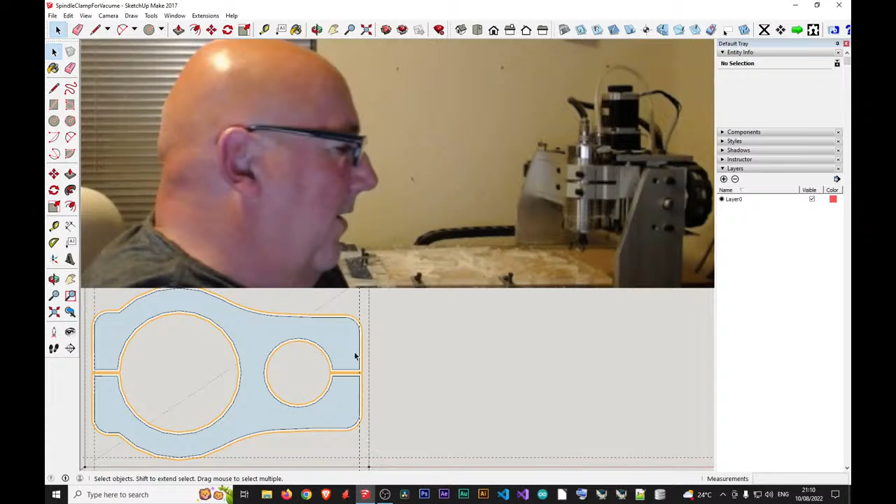Right, you know. Anyway, so let's just get this microphone sorted out again. It doesn't like me spinning around one way then the other.

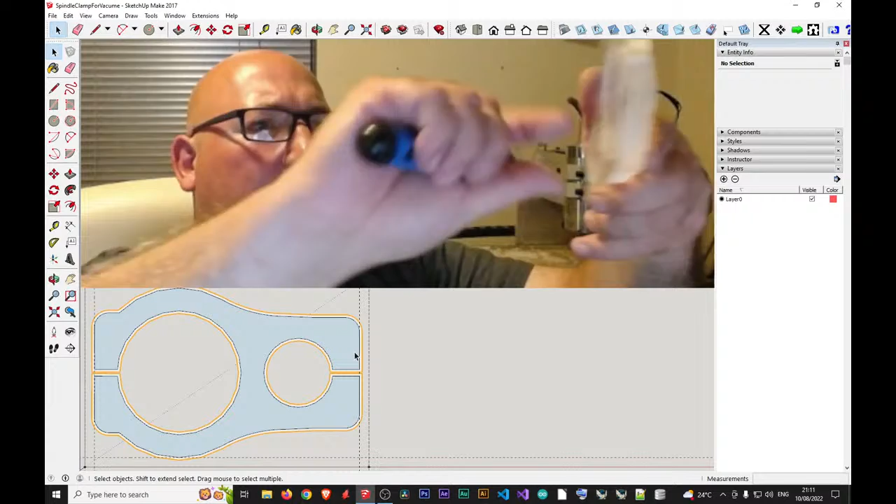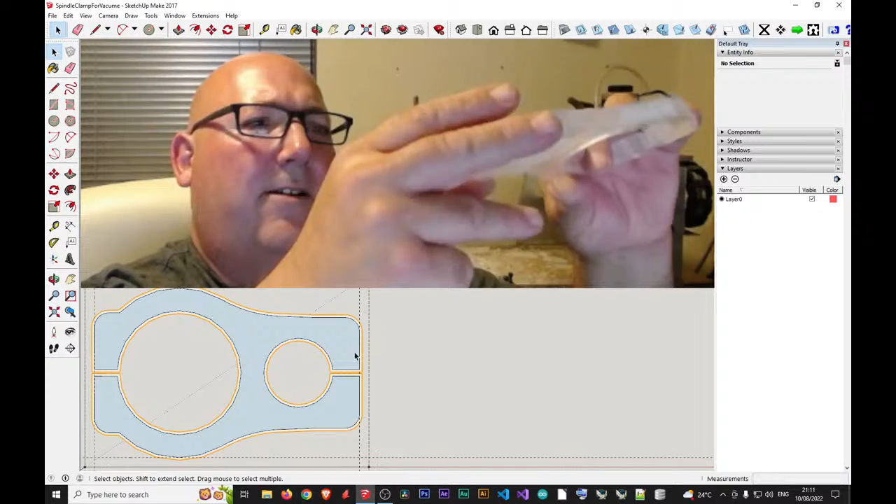Okay, so yeah, that was a nice success. I've got a bit of a deburring tool here. I don't know whether we need it. It might just be beneficial to go around it, just take any bits that are left off. Yeah, so I'm not sure if it's brittle, this stuff. Do you know what I mean? The rest is okay, isn't it? Yeah, there's a little bit there. Polycarbonate, you're not supposed to be able to smash it, are you? But yeah, I don't know. We shall have to see.

Yeah, slightly not the right shape. As you can see, it came off a bit of scrap material into mid-air. That should have been the same as up there, really. That should have been round like it is here, but it doesn't matter. It does the same thing, and it was made out of a bit of scrap, so that's the good thing.

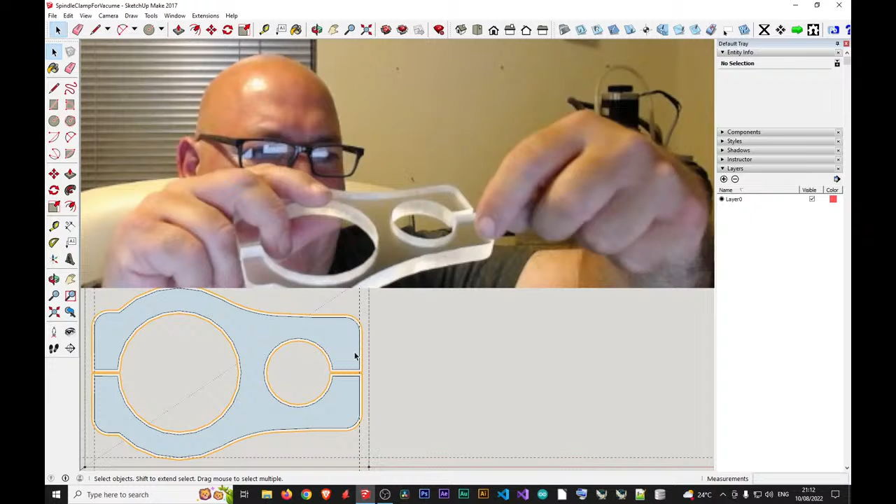Right, okay. So now what I've got to do is get a drill and drill through there. Put a nut and bolt, and the same this side. Doesn't have to be a lot, just enough to clamp both sides. Clamp this side, clamp that side.

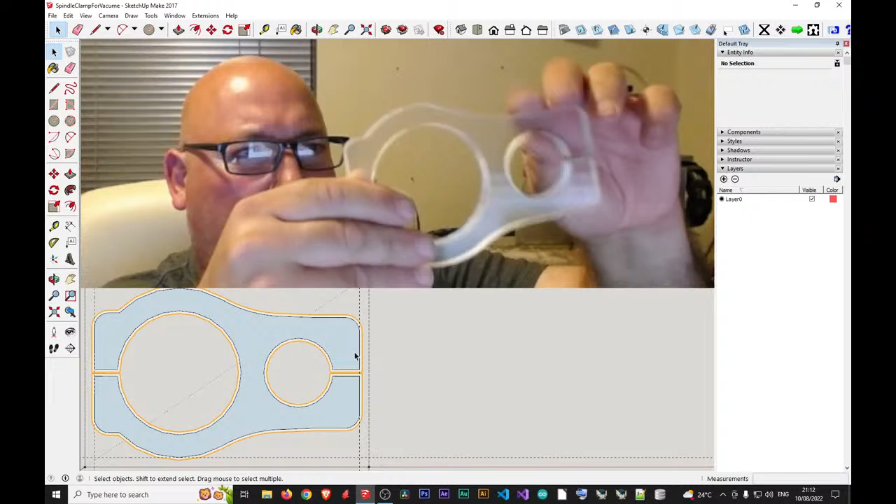Okay. Anyway, if I ever get round to doing that G code for the other stuff and put it onto a website, I'll probably put this on as well in case anyone else wants one. But it's only really any use to someone with one of these CNCs. Probably get one on Thingiverse. I bet if I searched, I'd find someone's already made one. But it's not that difficult to make one yourself. You can do it in SketchUp.

Alright, I'll clean the mess up later after the live stream's over. Alright, let's get back onto the other view. Okay, so there's that there. So, next time you see me milling out the wood, I'll be vacuuming at the same time. Okay, with a bit of luck. Yeah, with a bit of luck.

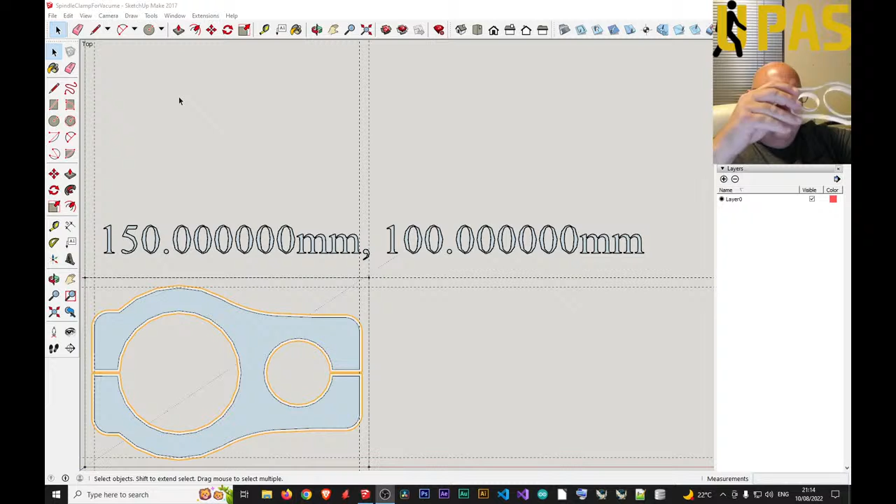So anyway, I've been Dave from UPass on a Wednesday night live stream making a little spindle clamp for my vacuum cleaner hose pipe to be clamped to the spindle.